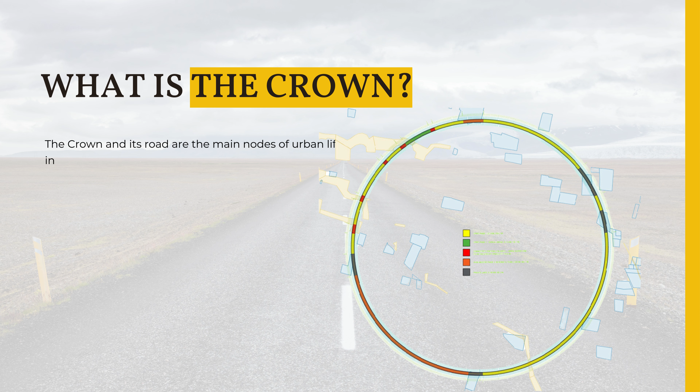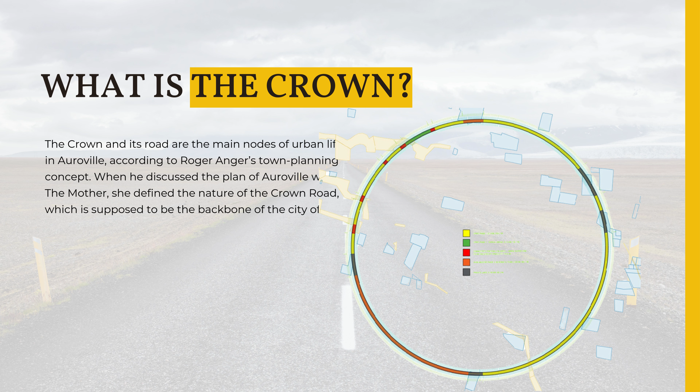The Crown and its road are the main nodes of urban life in Auroville, according to Roger Anger's town planning concept. When he discussed the plan of Auroville with the Mother, she defined the nature of the Crown Road, which is supposed to be the backbone of the city of Auroville. She classified its use as predominantly pedestrian, with only electric traffic at a slow speed. She even fixed the speed as a maximum of 15 km per hour.

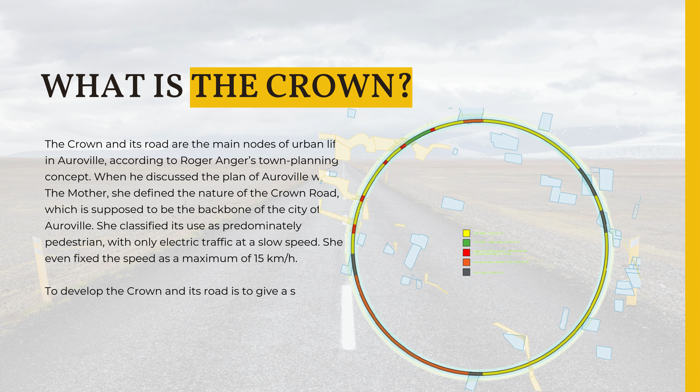To develop the Crown and its road is to give a system and orientation to Auroville's presently amorphous and unstructured growth. Work in progress. The Crown is being built in different phases. Phase 1, 2,552 meters, nearly completed by the CPWD. Phase 2, 155 meters, the Darkali Bridge, nearly completed by the CPWD. Connectivity portions: culverts, bridge, buffer zone, 170 meters to be executed by the CPWD.

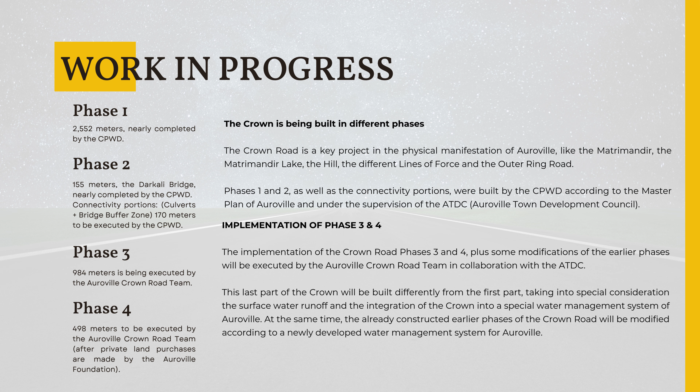Phase 3, 984 meters, is being executed by the Auroville Crown Road team. Private lands: Phase 4, 498 meters, to be executed by the Auroville Crown Road team after private land purchases are made by the Auroville Foundation. The Crown Road is a key project in the physical manifestation of Auroville, like the Matrimandir Lake, the hill, the different lines of force and the Outer Ring Road.

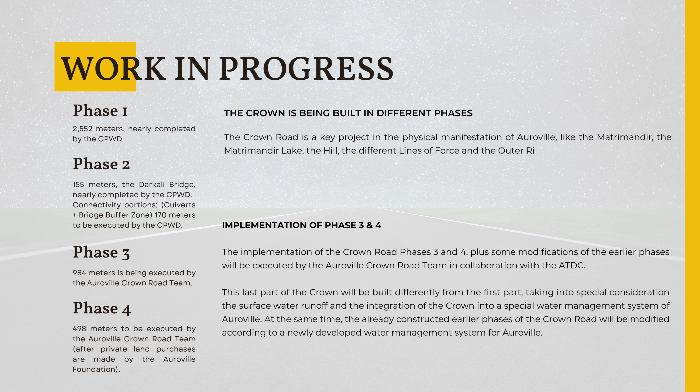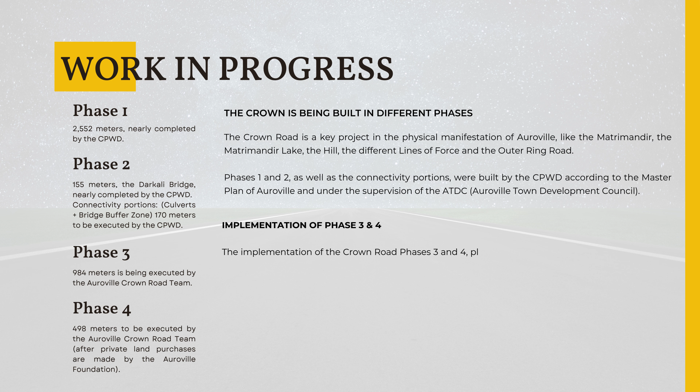Phases 1 and 2, as well as the connectivity portions, were built by the CPWD according to the master plan of Auroville and under the supervision of the ATDC, Auroville Town Development Council. Implementation of Phases 3 and 4: the implementation of the Crown Road Phases 3 and 4, plus some modifications of the earlier phases, will be executed by the Auroville Crown Road team in collaboration with the ATDC.

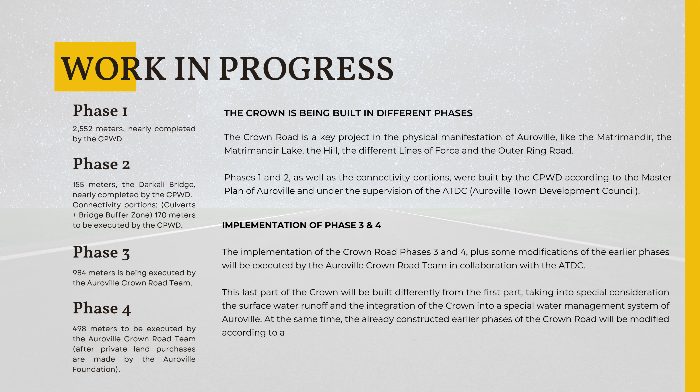This last part of the Crown will be built differently from the first part, taking into special consideration the surface water runoff and the integration of the Crown into a special water management system of Auroville. At the same time, the already constructed earlier phases of the Crown Road will be modified according to a newly developed water management system for Auroville.

Aspects of research. In India and the Auroville bioregion, water scarcity is one of the key issues that dominate the population's living standard and quality of life. Although Tamil Nadu and the Auroville region have a total annual average rainfall of about 1 meter water column, there are severe water issues, as there are in other parts of India. Yet, compared to, say, Germany, where the annual rainfall is comparable with that of the Tamil Nadu region, the difference is the high population density, the unevenly distributed rainfall and the loss due to evaporation.

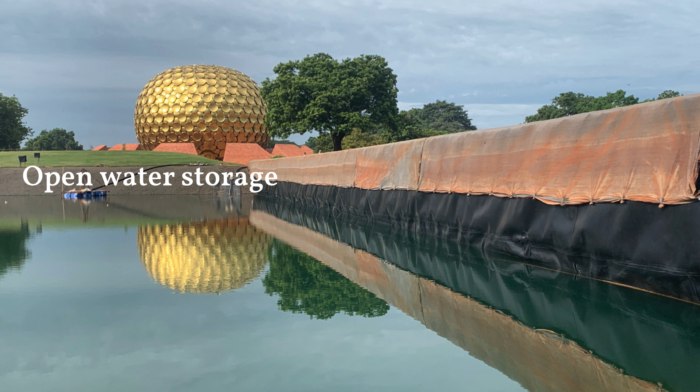This is leading to an overexploitation of the aquifers, with receding groundwater levels in the coastal areas of Tamil Nadu. Surface water runoff harvesting is one of the measures that India is adopting to help solve its water crises, and therefore a technology must be researched and optimized. Auroville is already taking bold steps in this field. With an optimized artificial open water storage, the Matrimandir Lake, which is 10 meters deep and waterproofed with HDPE foil, valuable research in runoff water storage is in process. With the development of an underground HDPE foil storage for drinking water, another important research is being done.

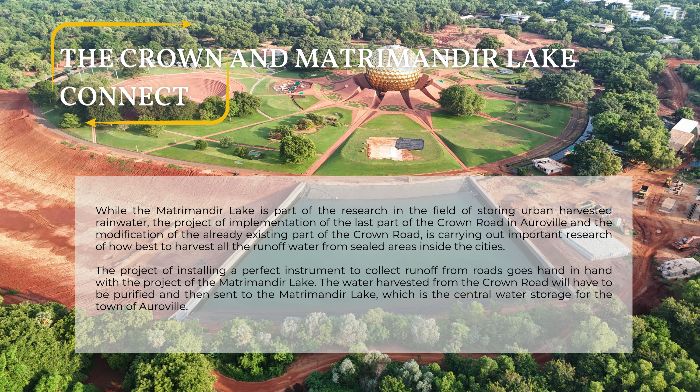The Crown and Matrimandir Lake connect. While the Matrimandir Lake is part of the research in the field of storing urban harvested rainwater, the implementation of the last part of the Crown Road and the modification of the already existing part is carrying out important research on how best to harvest all the runoff water from sealed areas inside cities. The project of installing a perfect instrument to collect runoff from roads goes hand in hand with the project of the Matrimandir Lake. The water harvested from the Crown Road will have to be purified and then sent to the Matrimandir Lake, which is the central water storage for the town of Auroville.

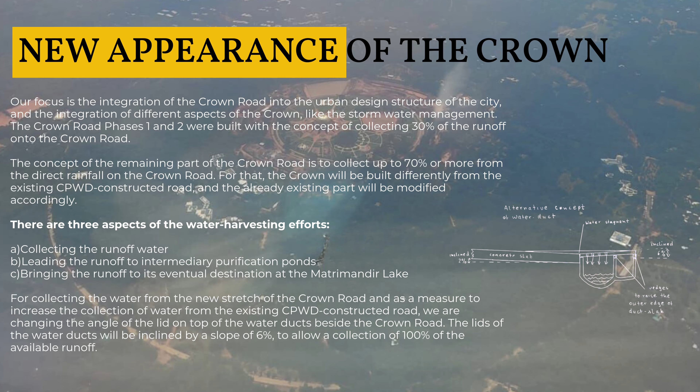New appearance of the Crown. Our focus is the integration of the Crown Road into the urban design structure of the city, and the integration of different aspects of the Crown, like the storm water management. The Crown Road Phases 1 and 2 were built with the concept of collecting 30% of the runoff onto the Crown Road. The concept of the remaining part is to collect up to 70% or more from the direct rainfall on the Crown Road. For that, the Crown will be built differently from the existing CPWD constructed road, and the already existing part will be modified accordingly.

There are three aspects of the water harvesting efforts: A, collecting the runoff water; B, leading the runoff to intermediary purification ponds; C, bringing the runoff to its eventual destination at the Matrimandir Lake. For collecting the water from the new stretch of the Crown Road, and to increase the collection from the existing CPWD constructed road, we are changing the angle of the lid on top of the water ducts beside the Crown Road. The lids will be inclined by a slope of 6% to allow a collection of 100% of the available runoff.

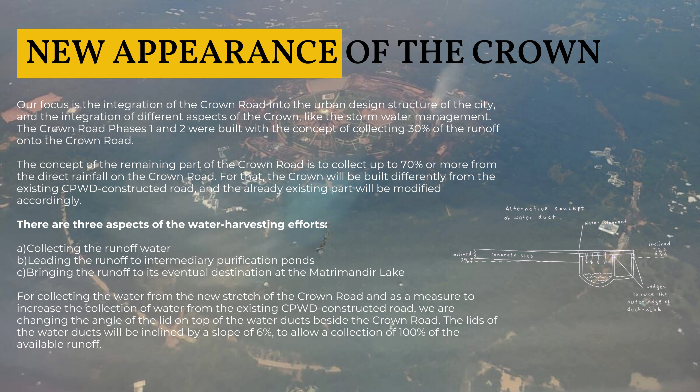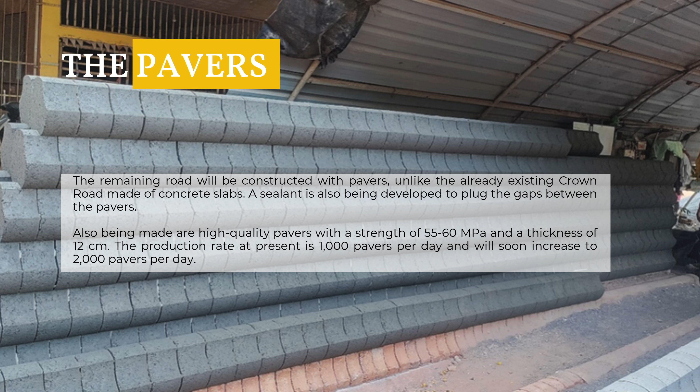The pavers: the remaining road will be constructed with pavers, unlike the already existing Crown Road made of concrete slabs. A sealant is also being developed to plug the gaps between the pavers. Also being made are high-quality pavers with a strength of 55 to 60 MPa and a thickness of 12 centimeters. The production rate at present is 1,000 pavers per day and will soon increase to 2,000 pavers per day.

Exit points for water. The number of exit points from the water duct of the Crown has also been increased. In the remaining 1 kilometer of Phase 3, there will be 2 exit points. The next drawing shows the 2 exit points from the water duct into a system of intermediary sediment separation and purification ponds, from where the water will be brought to the Matrimandir Lake.

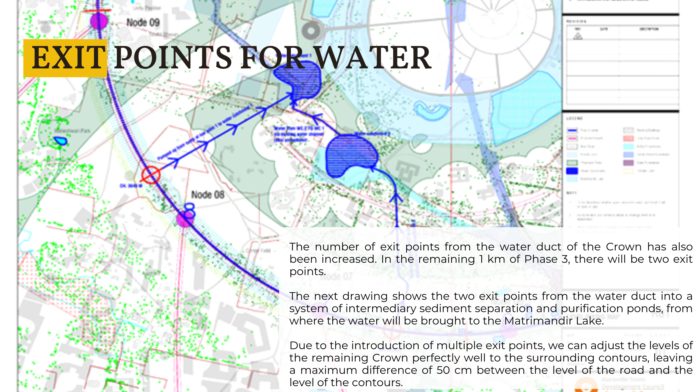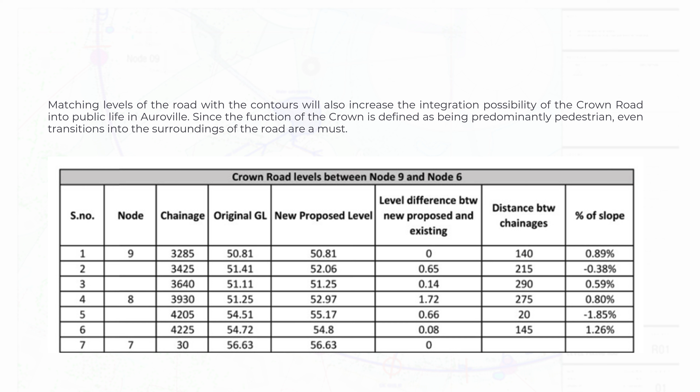Due to the introduction of multiple exit points, we can adjust the levels of the remaining Crown perfectly well to the surrounding contours, leaving a maximum difference of 50 centimeters between the level of the road and the contours. Matching levels of the road with the contours will also increase the integration possibility of the Crown Road into public life in Auroville. Since the function of the Crown is defined as being predominantly pedestrian, even transitions into the surroundings of the road are a must.